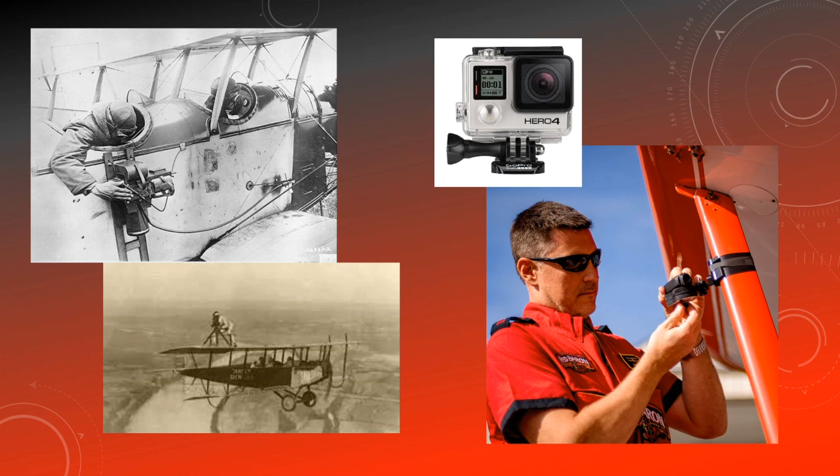Shooting aviation video has come a long way. Today's small sports cameras such as the GoPro are an invaluable tool for safety, training, data recording, and is also one of the best ways to promote aviation. Our future aviators may be the children influenced by watching aviation videos on social media.

The challenge with aviation video is that pilots and mechanics are required to follow regulations written before sports cameras even existed. Believe it or not, this is actually a good thing. Just look at the regulations now in place for drones.

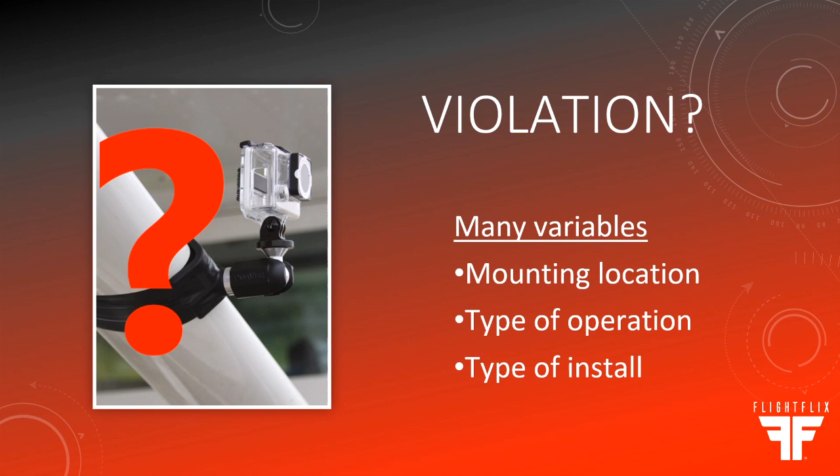So the question, can I mount a camera on an aircraft? This is a hot topic. Given the many variables, the answer is more complicated than a simple yes or no. Here we will briefly cover some regulations, cautions, and solutions.

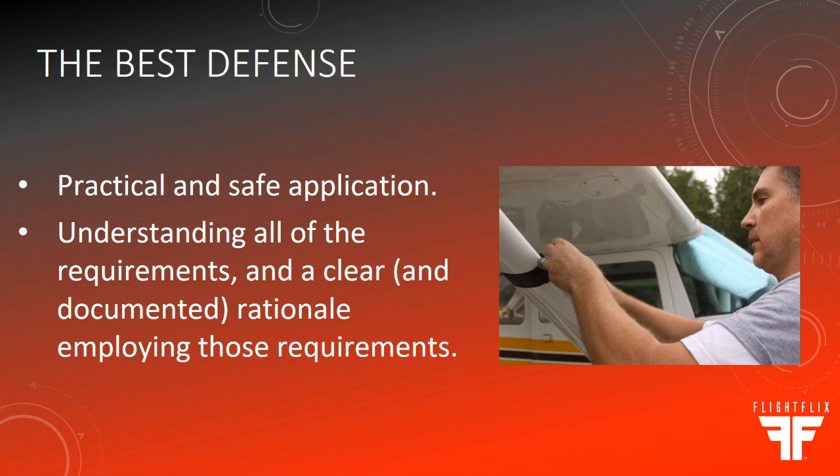As with anything, the best defense to avoid violation is a good understanding of the requirements and a clear, safe, and documented rationale. We pilots talk about the gray area. The regulations are open to interpretation.

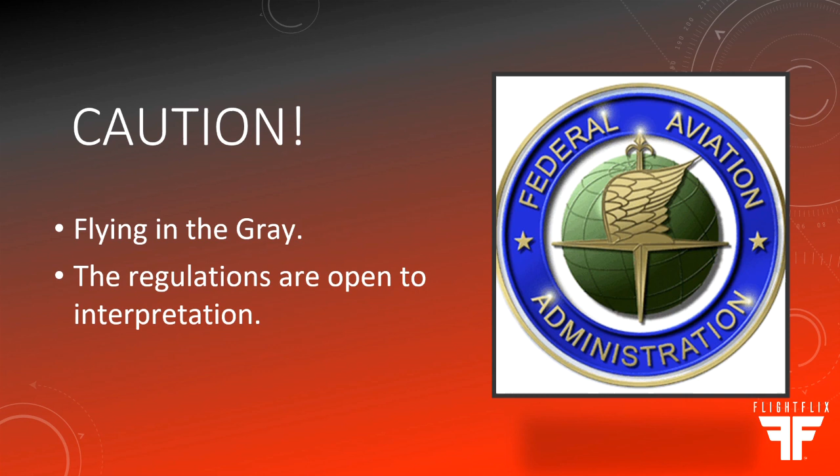The FARs can be viewed differently even within the FAA. Try not to get caught in what is called a deviation of the regional norm. Groups or regions can easily develop ideas and definitions over time that may differ from the FAA.

A great example of this is a FAA memo from 2014. At the time, a company presented this memo online as the FAA says it is okay. Many have assumed this is allowing pilots to stick a GoPro on an aircraft. The intent, if anything, was just the opposite.

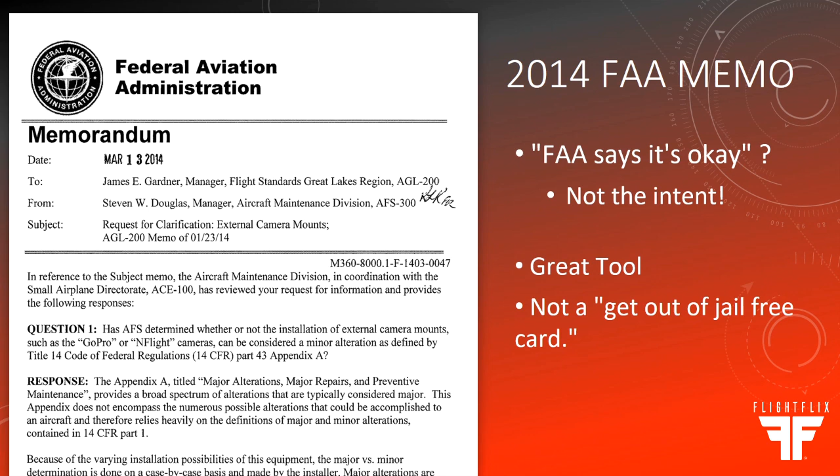This memo does well summarize the regulations, and there are some great references we can use from it. It is important, though, to understand this is not a get-out-of-jail-free card. If you search through the FARs, good luck finding any regs that directly apply to installing cameras.

So what guidance do we use? The FAA typically sees attaching anything to an aircraft as an alteration or modification to that aircraft. There are many levels to which an aircraft can be altered. Even though a small GoPro is not much of an alteration, we still need to consider the entire scope of an alteration, as would the FAA.

So let's cover the relevant regulations and lay out an easier method to complying with them. This can be confusing even for mechanics. This advisory circular is a tool to assist mechanics.

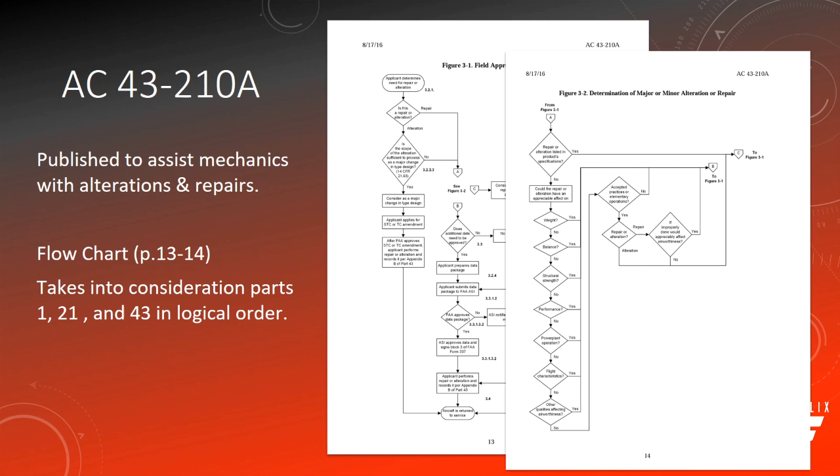Included is a great flowchart that we can use to navigate the entire scope of an alteration. This flowchart references the applicable FARs in logical order. I know talking about regulations aren't the most exciting, so I will run through this somewhat briefly with a general overview.

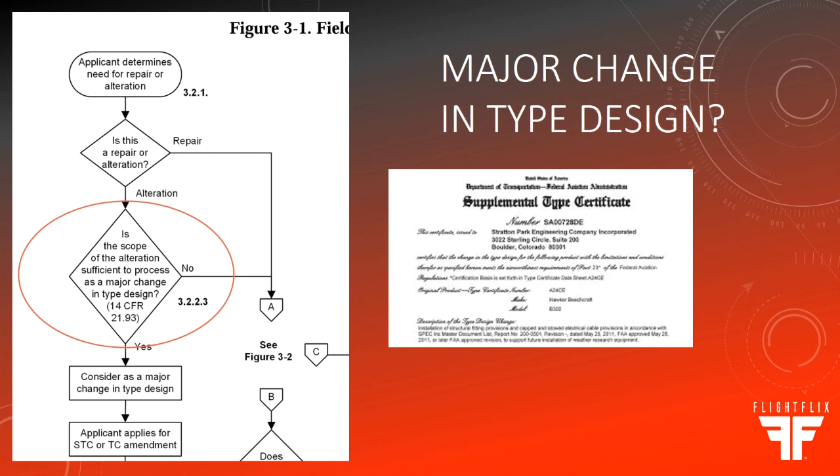The first thing we need to establish is that our camera installation is not a major change in type design. An example of this would be an STC. In general, a small camera like a GoPro would rarely be a major change in type design.

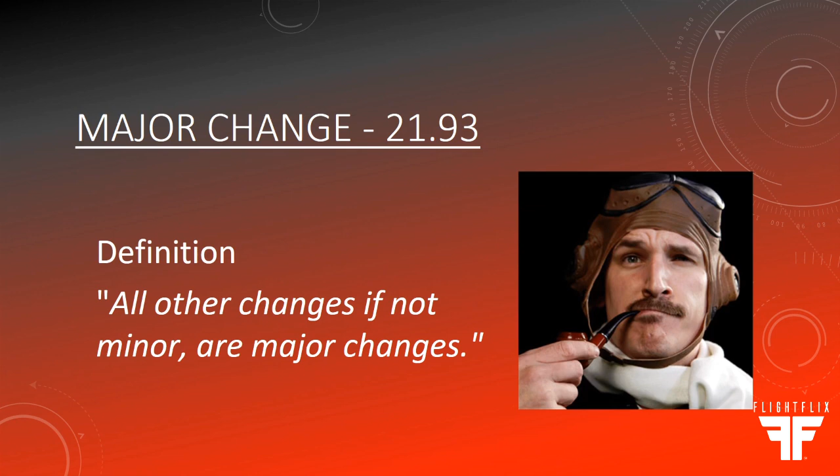The definition of a major change is all other changes, if not minor, are major. The definition of a minor change is one that has no appreciable effect on the weight, balance, structural strength, reliability, operational characteristics, or other characteristics affecting the airworthiness of the product. The word no means none of these can be affected by your camera.

Example, a camera screwed into your wing spar could affect numerous items on this list. You would then require an STC. Weight or balance in this case is not adding the weight of the camera to your weight and balance. It is referring to a change to the weight and balance envelope of the aircraft, such as increasing the gross weight.

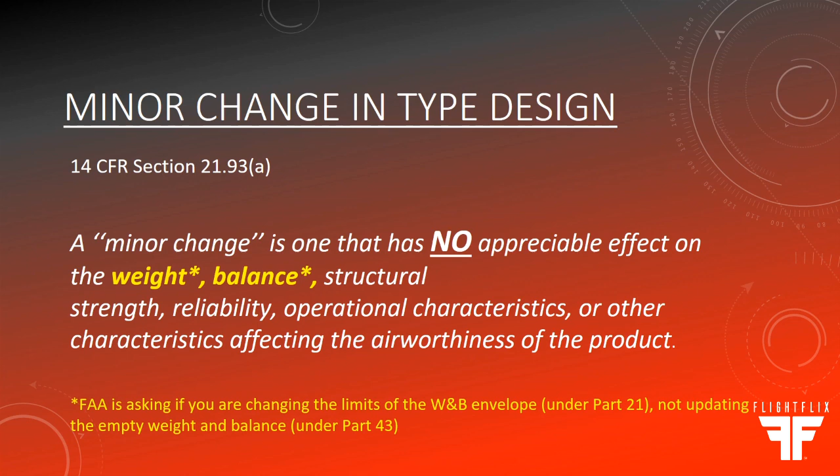Just because you fly experimental doesn't mean you're exempt. Part 21 applies to experimental amateur-built aircraft also, meaning if the aircraft is altered in such a way that influences any of these listed items, you may be required to conduct test flights.

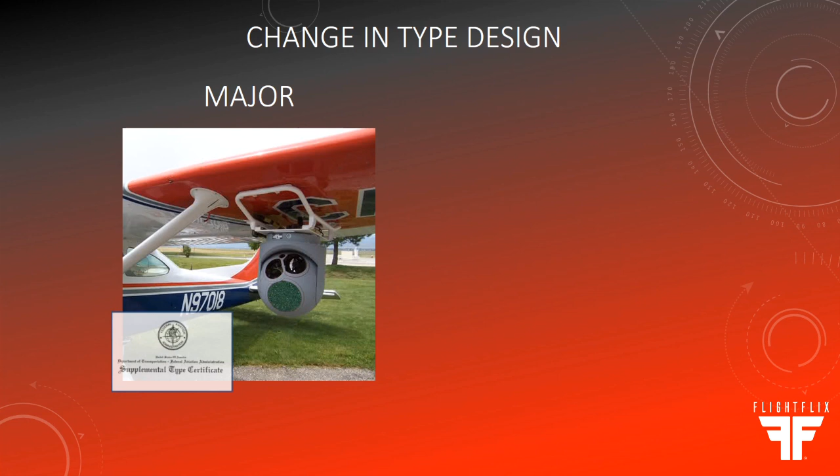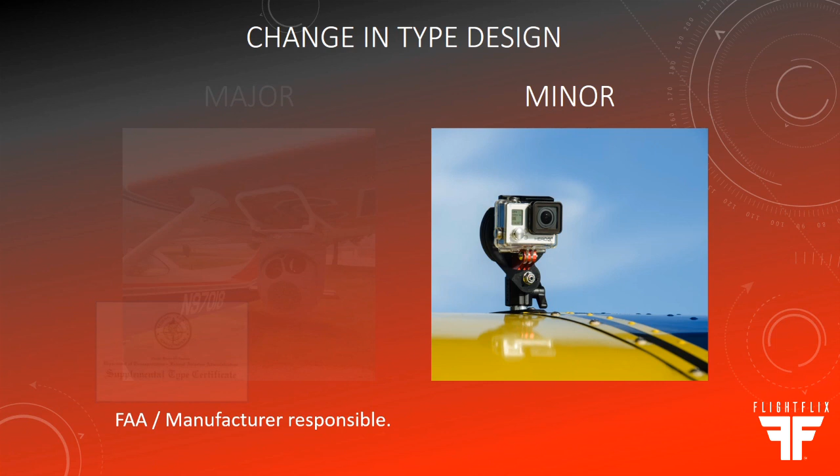Here's an example of a major versus minor change. The camera on the left is obviously going to affect items on the list, whereas the GoPro probably not. The large camera depicted would be a major change requiring an STC, whereas the GoPro could be classified as a minor change. The FAA or aircraft manufacturer is responsible for a major change.

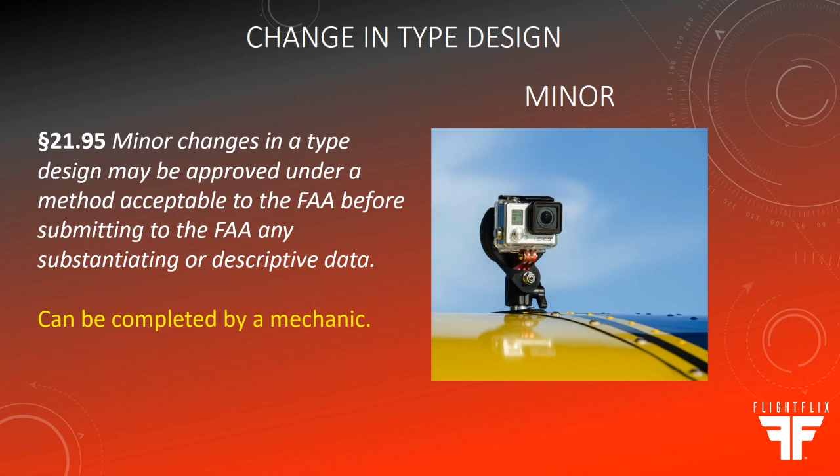A minor change, however, can be completed by a mechanic through an alteration. This is where it gets confusing. A change in type design is major or minor, and a minor change is broken into two more categories, major and minor alteration.

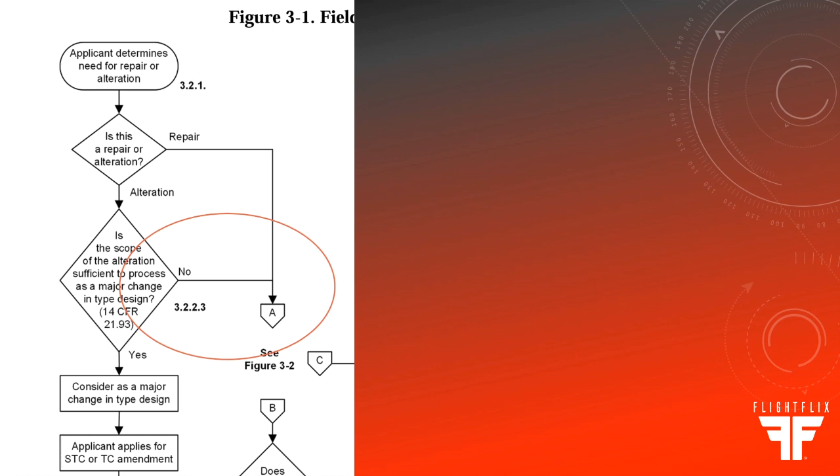Changes are under Part 21, and alterations are under Part 43. What does this mean to you?

Going back to our flowchart, we follow a minor change, bringing us to page 2. This, by the way, is where experimental aircraft get relief. Part 43 does not apply to home built, so the owner of an experimental amateur-built aircraft can essentially complete an alteration. Just don't forget, Part 21 does apply, as does Part 91, which we will get to shortly.

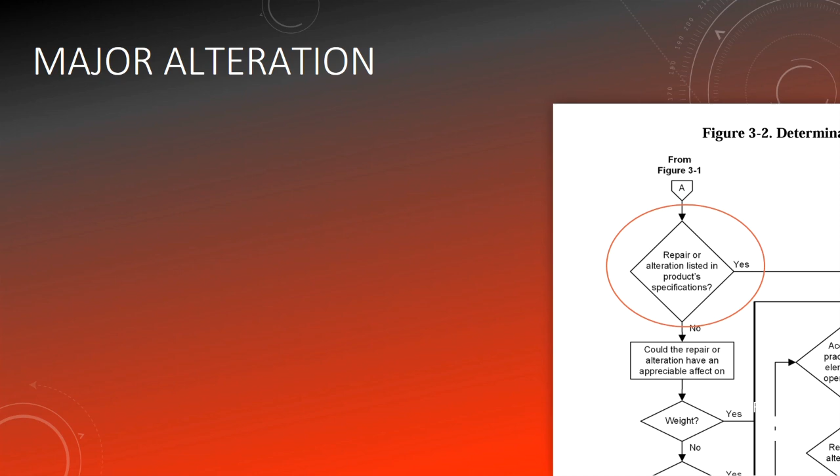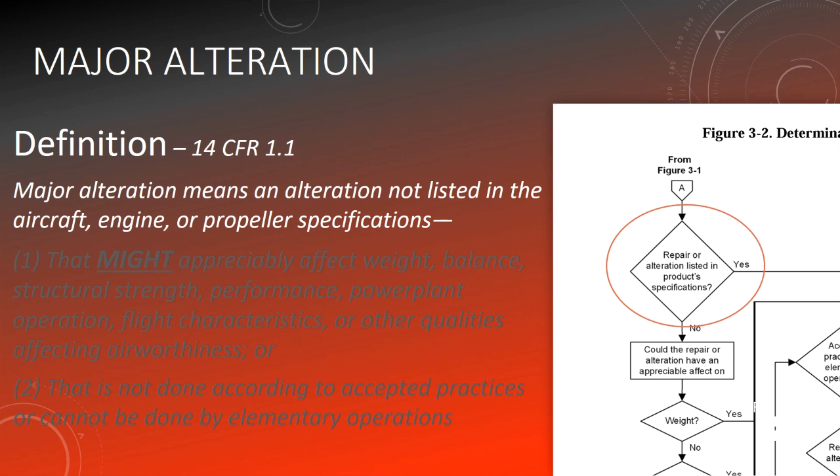Back to our flowchart, we must figure out if our alteration is major or minor. The chart here guides us through the definition of a major alteration. First, is the alteration listed in the product specs? Product specs would be if your aircraft manufacturer sold a camera mount with specifications for the installation or repair of it. This is not likely.

Next, a major alteration is one that might appreciably affect weight, balance, structural strength, performance, power plant operation, flight characteristics, or other qualities affecting airworthiness. Even though this list looks like the major change definition, its meaning is different. If your camera installation might affect any of these on the list, you need to consider a major alteration.

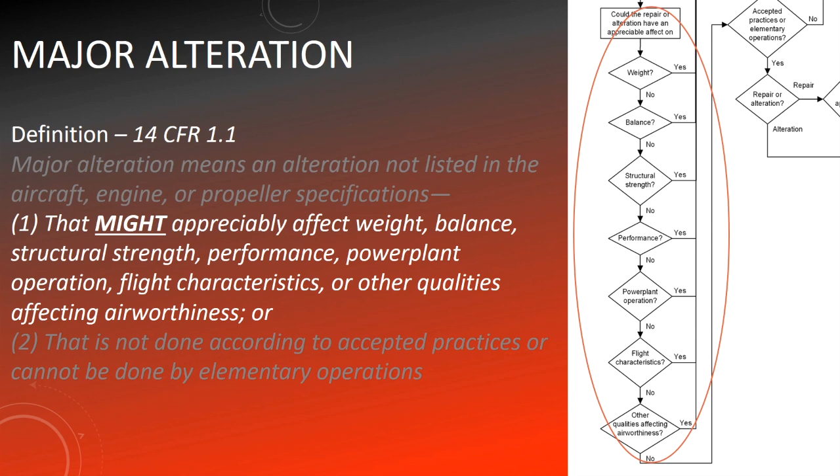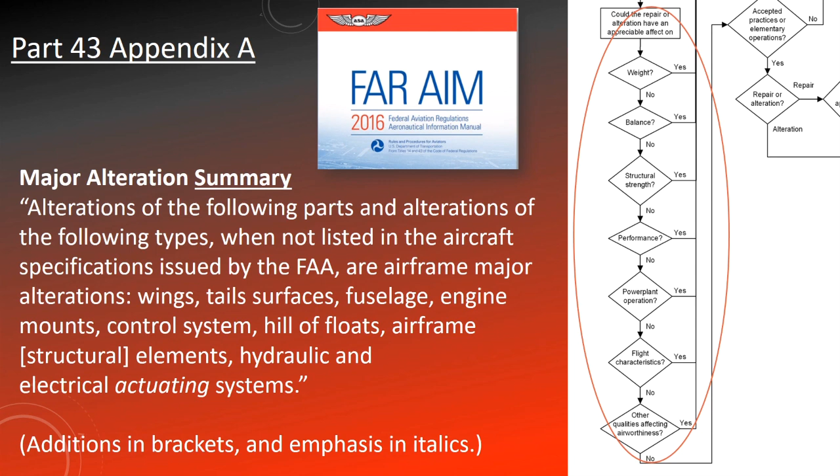You can talk to your mechanic about this. The major alteration process is typically approved by the FAA with a 337 field approval. If needed, you and your mechanic can dig deeper into this using Part 43 Appendix A.

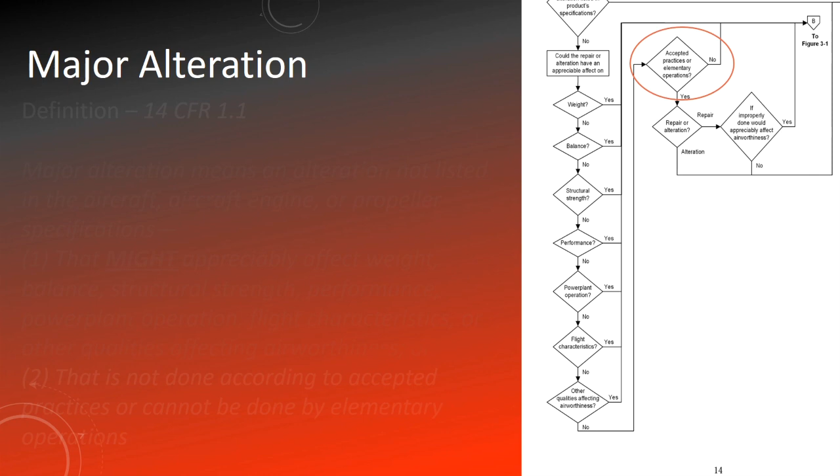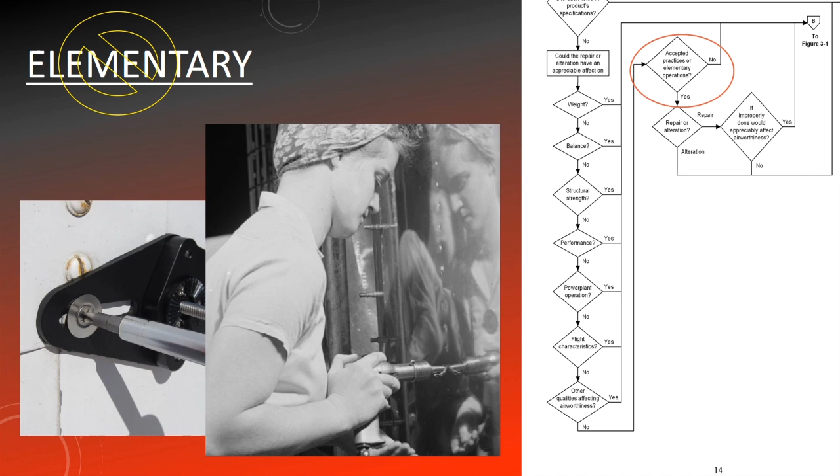Lastly, can the alteration be completed according to accepted practices or elementary operations? An example of elementary operations would be the use of a screwdriver. If you need to rivet or weld, this would not be elementary, and you would no longer be a minor alteration. Accepted practices is the allowed maintenance practices your mechanic is responsible for.

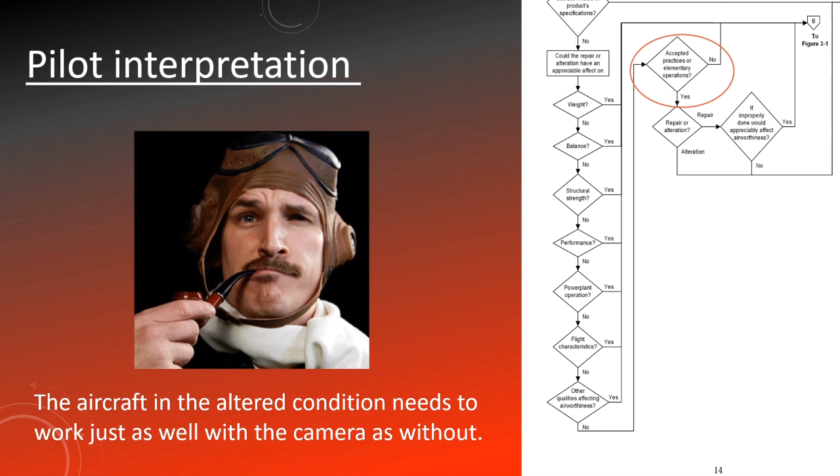An important part of this to be aware of is Part 43.13(b). In short, this is saying that the aircraft in the altered condition needs to work just as well with the camera as without. This gives the FAA one more angle to make sure you are not doing anything that could affect safe flight. The definition of a minor alteration is any alteration that is not major.

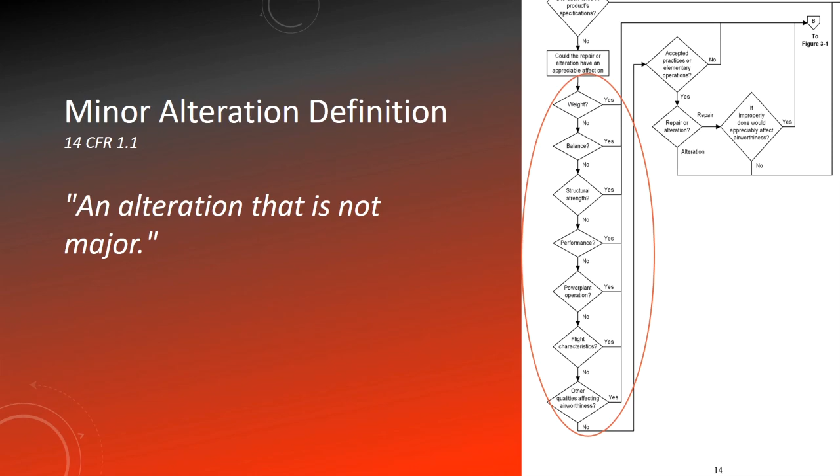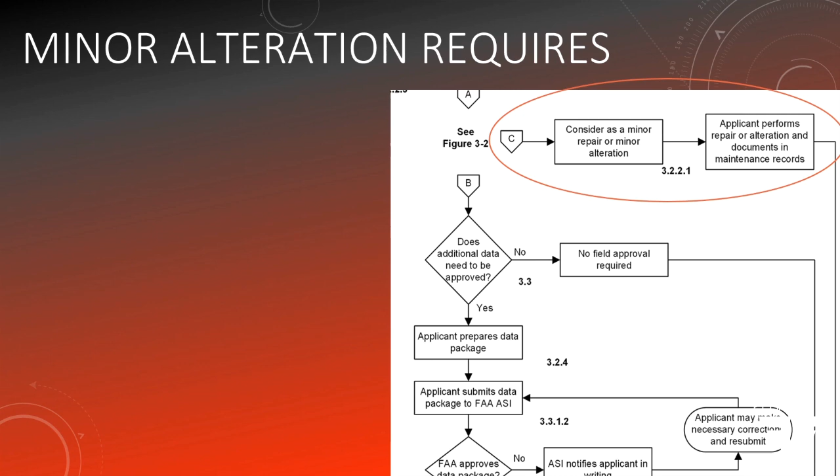So, essentially, if no items on this list are affected, and we can maintain accepted practices and elementary operations, we can flow through the chart to a minor alteration. A minor alteration requires only a logbook entry from an A&P mechanic. No 337 or field approval required.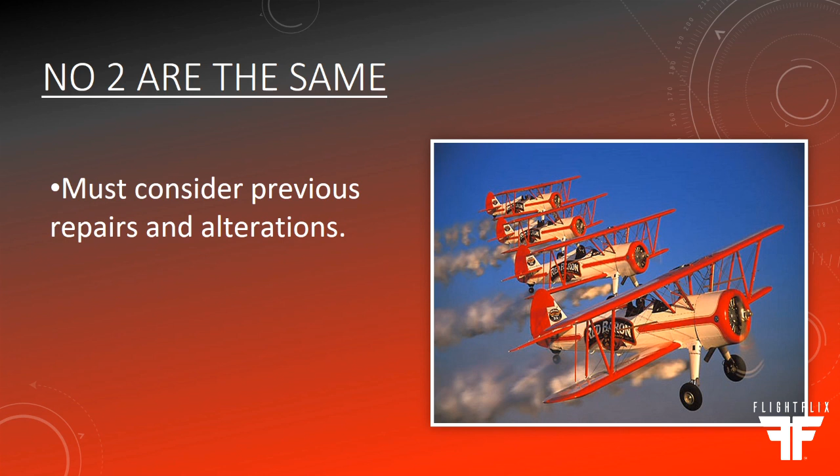Now, just because your buddy with the same make and model aircraft did it, doesn't mean you can. We need to consider every alteration and repair over the life of the aircraft.

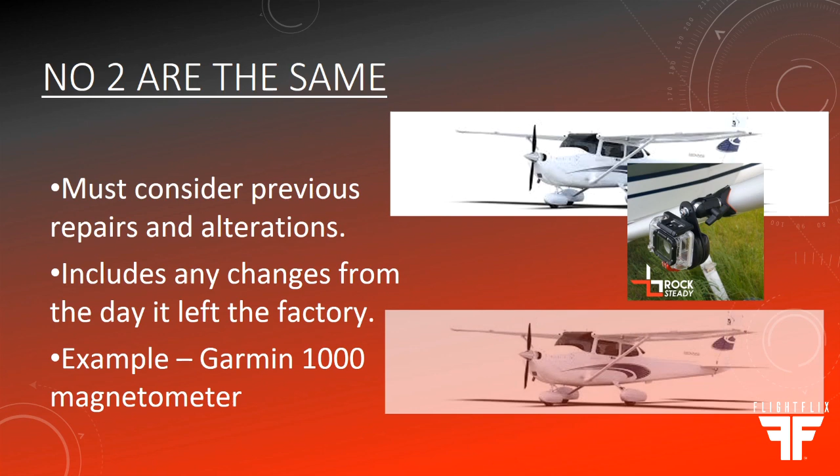An example would be a camera installed on the left wing of a Cessna 172. On another 172, the same setup would not be allowed with a G1000, given the camera's close proximity to the magnetometer in the left wing.

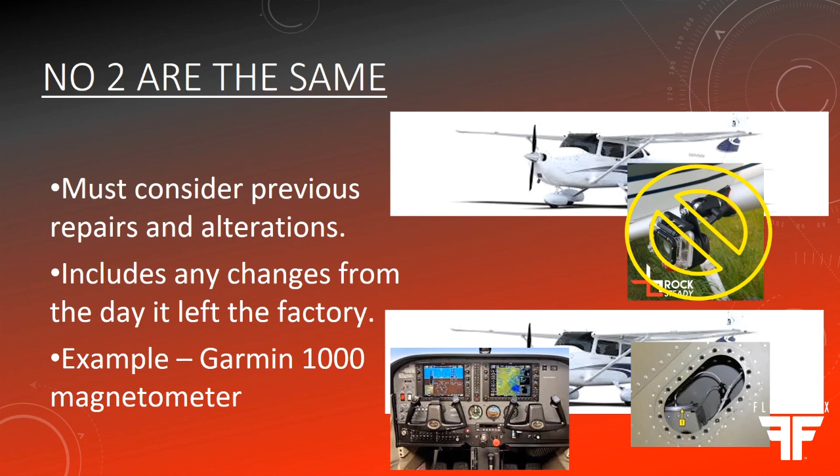So at this point, we have covered repairs and alterations. An alteration is defined by the FAA as a modification of an aircraft from one sound state to another sound state. What if we do not modify the aircraft at all?

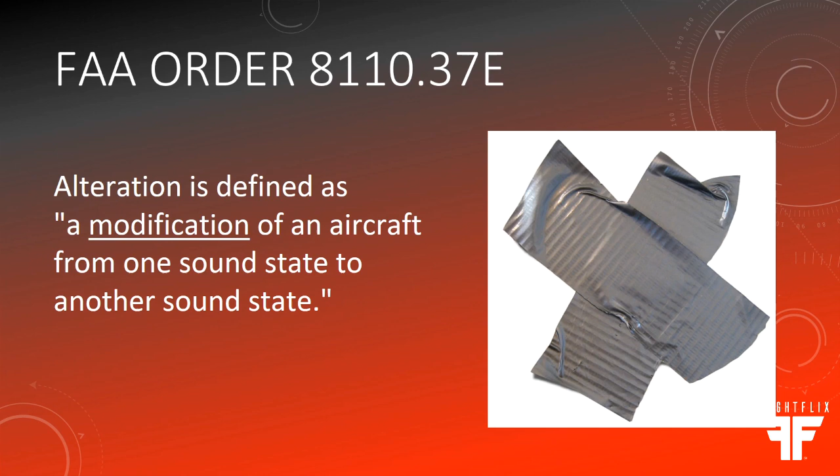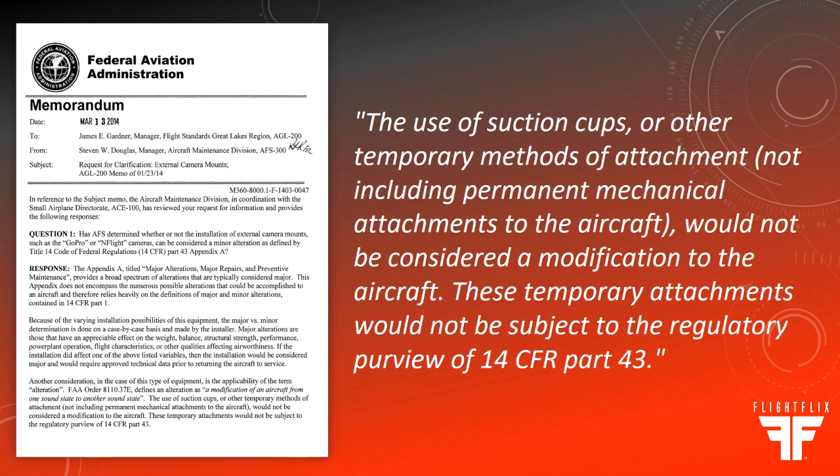If we use a temporary attachment, are we modifying or altering the aircraft? Referring back to the 2014 memo, the FAA states, the use of suction cups or other temporary methods of attachment, not including permanent mechanical attachments to the aircraft, would not be considered a modification to the aircraft. These temporary attachments would not be subject to the regulatory purview of Part 43.

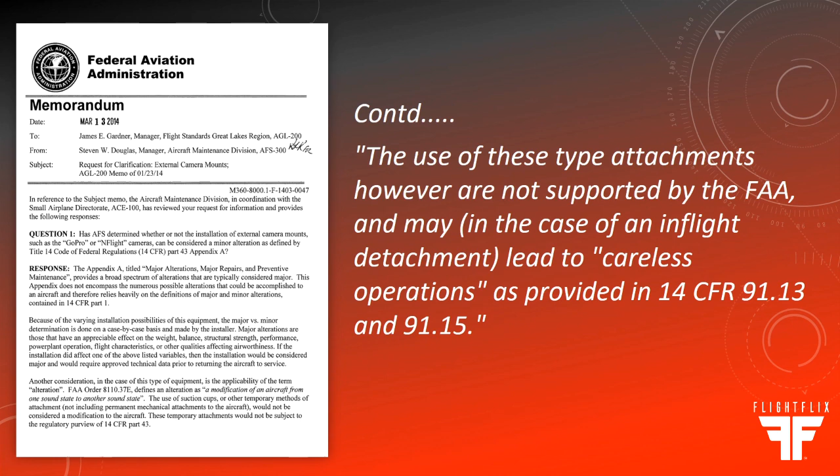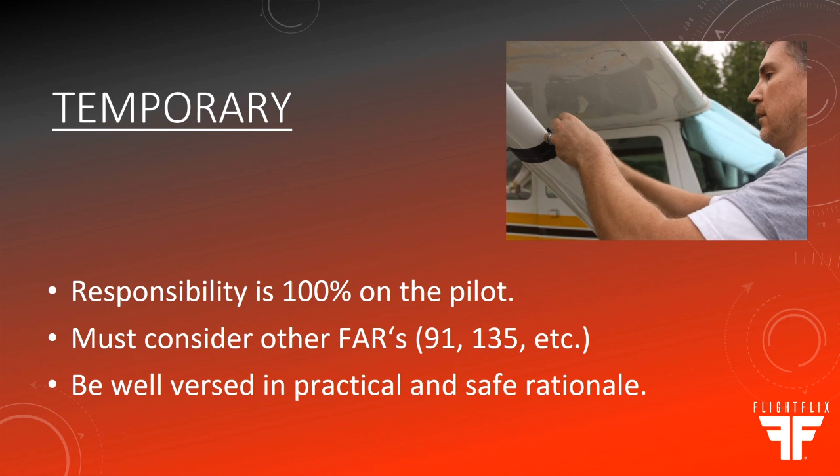The use of these type attachments, however, are not supported by the FAA and may, in the case of an in-flight detachment, lead to careless operations as in Part 91. In essence, we are operating on the basis that there is nothing saying we can and nothing saying we can't. If the FAA does not support temporary, this means you as the pilot are solely responsible.

The word temporary is not even defined in the FARs. So what can we consider temporary? You may have heard using tools is the difference. The use of tools is not actually written anywhere that I know of.

However, it may be a good place for us to personally draw the line. It is an easy argument to show that your device is temporary if it can be attached and removed by hand without the use of tools. Once the toolbox comes out, you quickly approach a dark gray area on what a pilot versus a mechanic is allowed to do.

There are some advisory circulars for portable electronic devices that touch on temporary. These ACs state we can use portable electronic devices if they are not a distraction and are not positioned to interfere with aircraft control and operation. Make sure you and your passengers operating a camera are not a distraction or interference to flight.

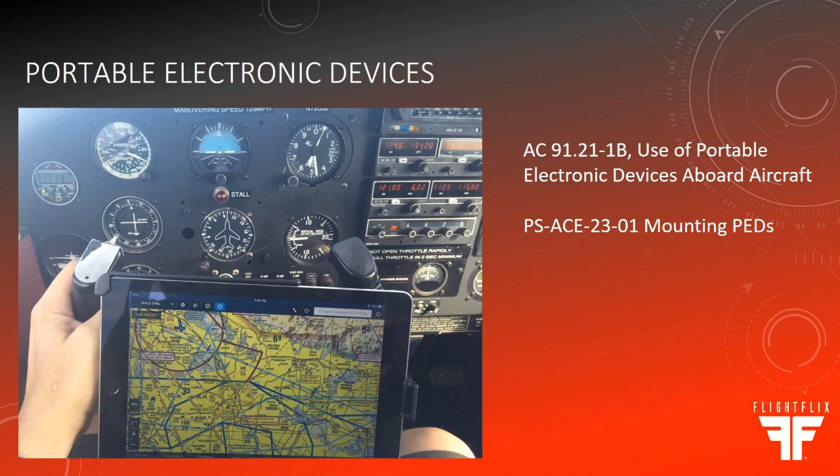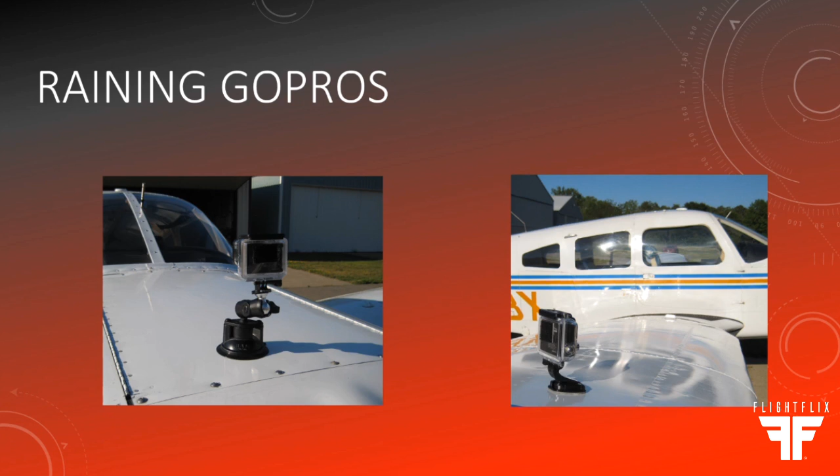The FAA is not out hunting for cameras. There is a big push to stop cameras falling off aircraft. A violation under Part 91 and the liability of a dropped object is the same whether experimental or certified. There are no exceptions for taking proper safety precautions.

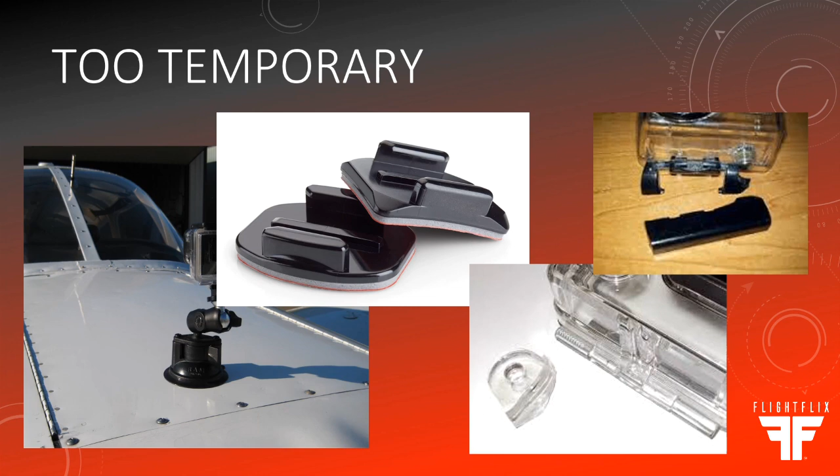The biggest problem is the use of temporary that is too temporary. A suction cup seems like an obvious bad idea. The common use of sticky mounts and plastic parts may not be as obvious. Sticky mounts and plastic parts sold with sports cameras frequently fail, and the FAA has taken great notice of this.

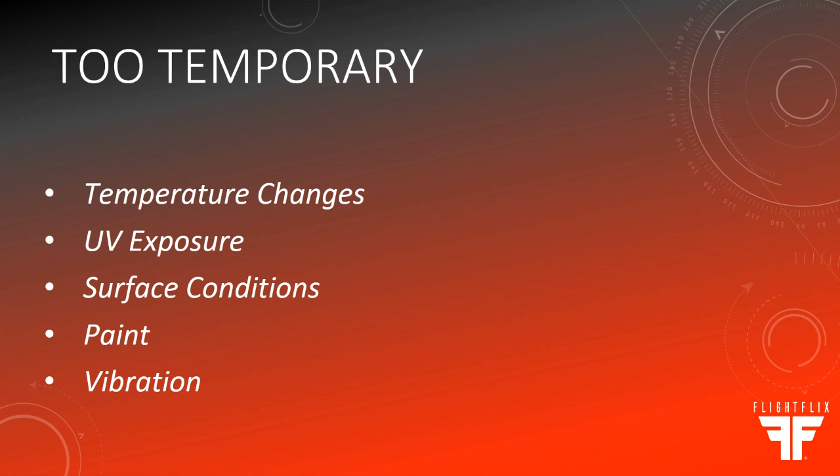The strength of sticky mounts is impressive. The issue is more the paint or gel coat combined with temperature changes, vibration, and contamination. I have seen a small screw through a sticky mount as a safety measure. Even if the sticky mount stays, plastic mounts and plastic cases often break. It is a matter of time before plastic mounts and cases crack from prolonged vibration and UV exposure.

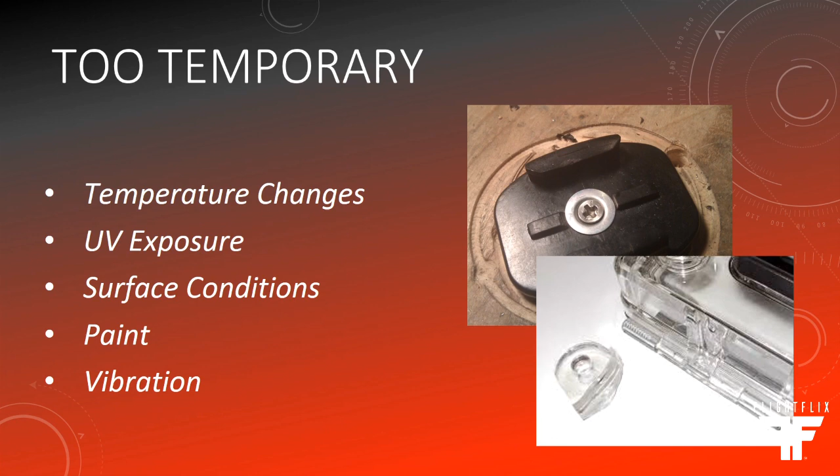Regardless of FAA violation, the price of your camera is nothing compared to a lawsuit. When your face is found on the first video file, it's obvious where the camera came from.

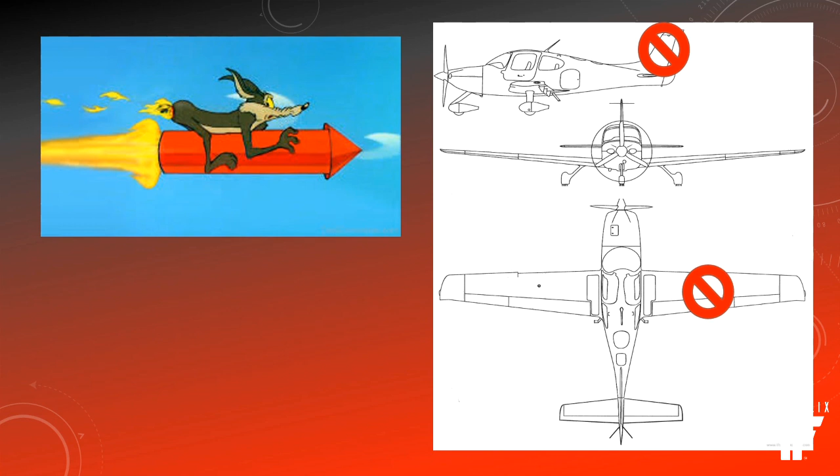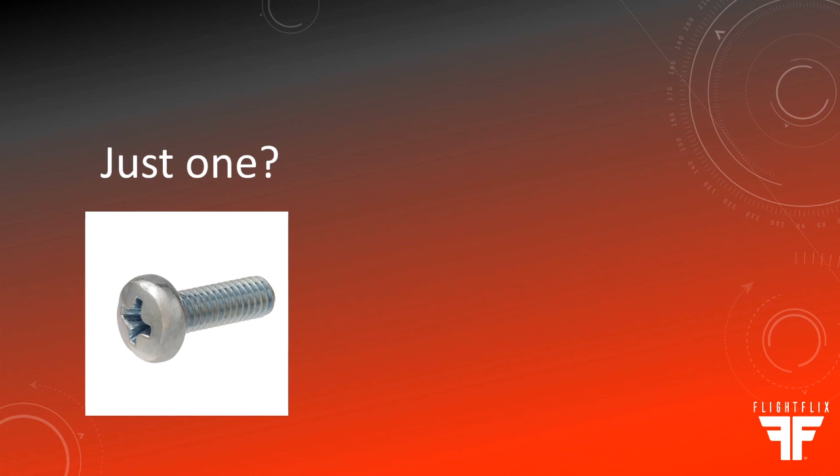The FAA is finding too many bad practices, such as mounting cameras on top of the wing lifting surface, on control surfaces, and even on the pitot tube. Single fastener mounts should be avoided too. Anything a mechanic or the FAA would approve is required to have redundancy. Hanging a camera and mount from a single screw is asking a lot of that fastener.

A standard GoPro at 150 knots has at least 5 pounds of force on it. With 2 or more fasteners, at least if one fails, it could be caught on a pre-flight or inspection. Your mechanic would not use one screw following accepted maintenance practices. Pilots should consider similar redundancy.

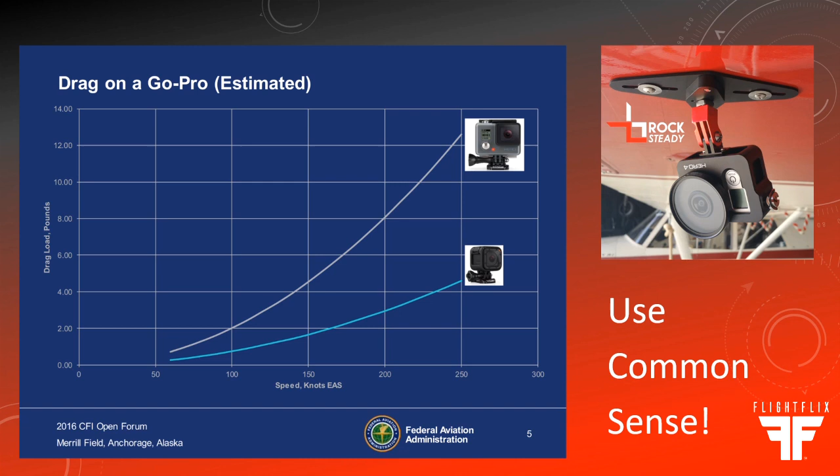The most important takeaway is to be safe and use common sense. So let's summarize. What can you do? You can take it upon yourself to use a temporary device. Temporary is not defined nor supported by the FAA. And you, the pilot in command, are taking full responsibility and liability.

If temporary is not an option, then maybe a minor alteration is. The minor alteration requires only a logbook entry from an A&P mechanic. Now the responsibility falls on the A&P. So don't be surprised if your mechanic is not willing to hang his or her hat on a non-FAA approved device.

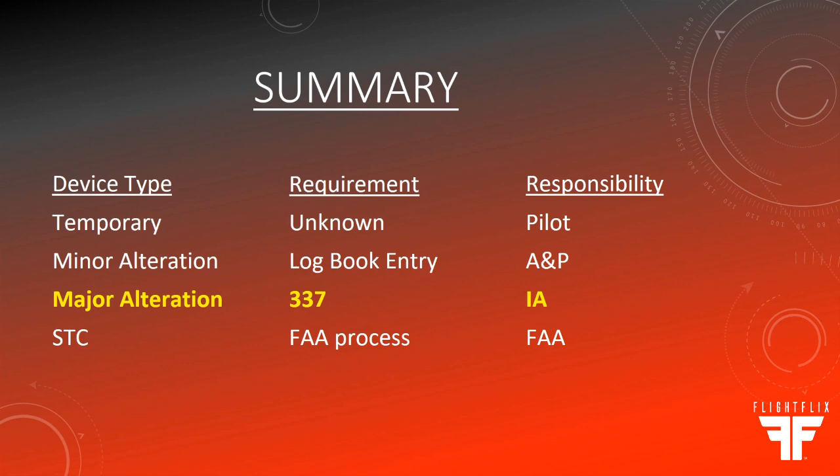The next option is an FAA approval. This is typically accomplished by an IA mechanic using a field approval in Form 337. Now the responsibility falls on the IA. Once again, don't be surprised if your IA is not accommodating. The IA and FAA may want engineering data. Data is typically generated by a DER, a designated engineer, which can get expensive.

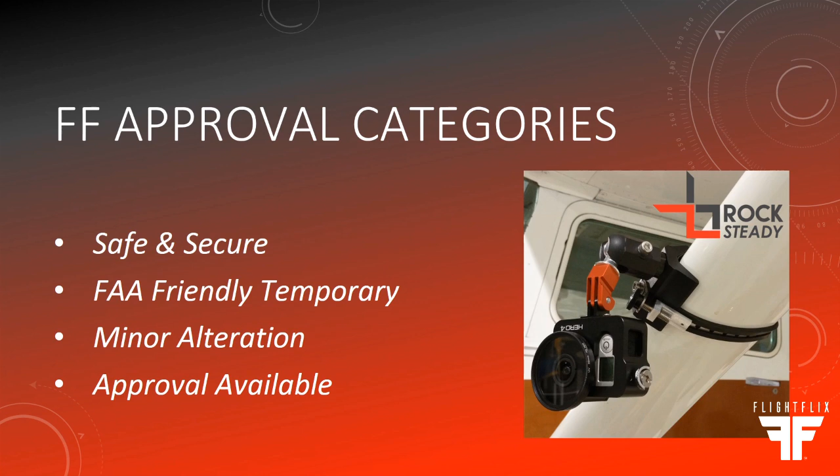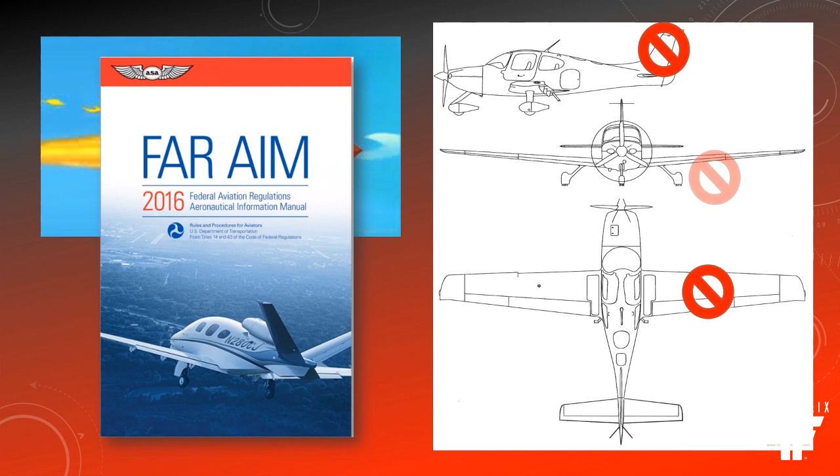Again, the most important element is to be safe and use common sense. Have a good understanding of the required regulations. Avoid attaching cameras to or near control surfaces, on top of the wing, and near the pitot system. Take precautions to eliminate camera detachment, avoiding violation and lawsuit. Avoid sticky mounts, plastic parts, and single screw mounts.